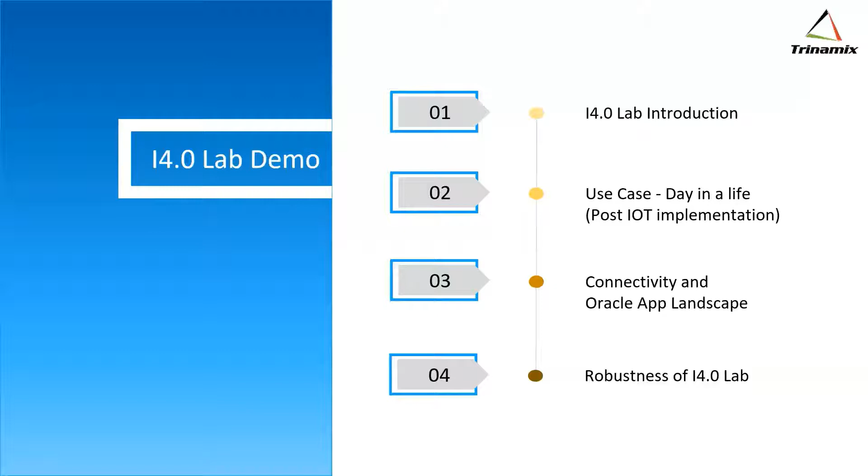For this demo, first I'll introduce different components of the factory, which we have built at a miniature version. Secondly, I'll walk you through a use case we've built over the lab through a day-in-a-life scenario for personnel across different hierarchies and departments, administrating, monitoring, and supporting production, and how we achieve it. Lastly, the modularity and robustness of the lab, through which we can orchestrate common use cases across different industries through the Oracle application landscape.

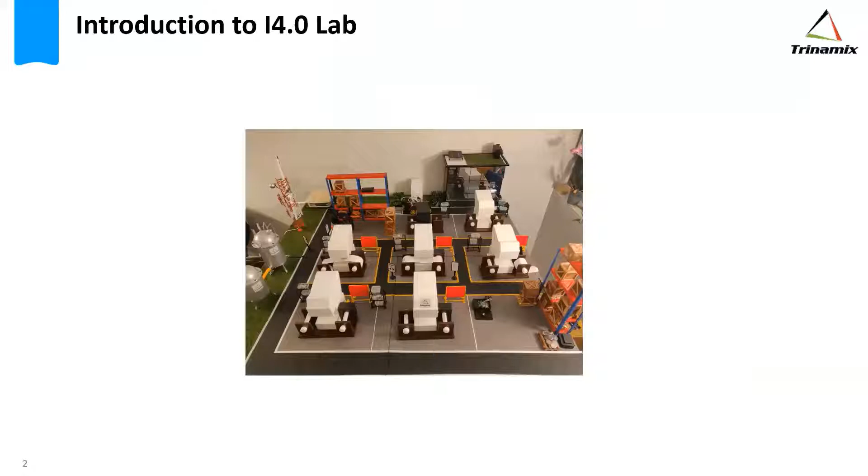The lab is at our San Jose office. In this lab, we have 7 miniature machines on the shop floor, each housed with 2 motors and gears, replicating some standard mechanical movement found across industrial machines.

Along with this, we have 7 functional assets, again built at a smaller version, like forklift, boiler, conveyors, office assets, solar panels, and connectivity assets supporting the production system. We also have raw material and finished goods racks with sensors at each locator and a barcoding system to understand storage capacity utilization and inventory management.

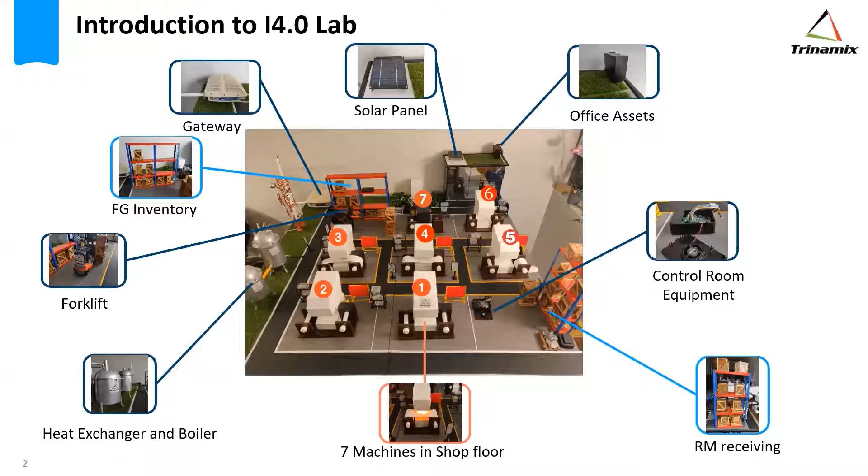Let's explore an industry use case of an auto ancillary muffler manufacturing. For this part of the demo, let's consider a scenario where I am the factory manager and you have come for an industrial visit primarily to see our company's efforts towards digital transformation, and how we have enabled our workforce to enhance customer experience by building higher quality products, supplying at one of the lowest costs.

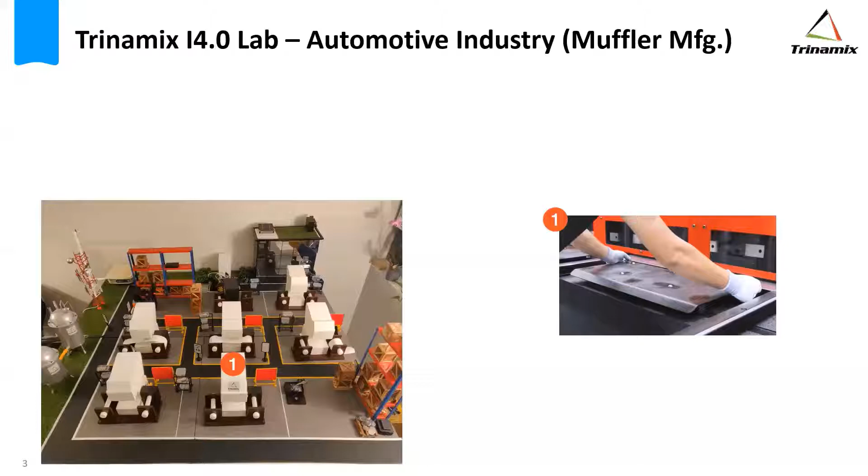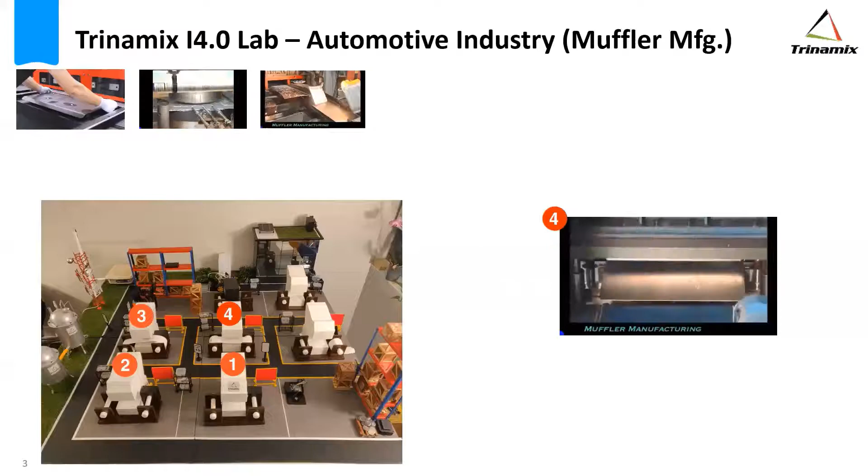Firstly, let's understand the production process. We have 7 workstations starting from sheet cutting, where large sheets are transformed into smaller pieces. Thereafter, a series of stamping and forming operations transform the sheet into the required shape. Post that, we assemble and weld the components to make the final product.

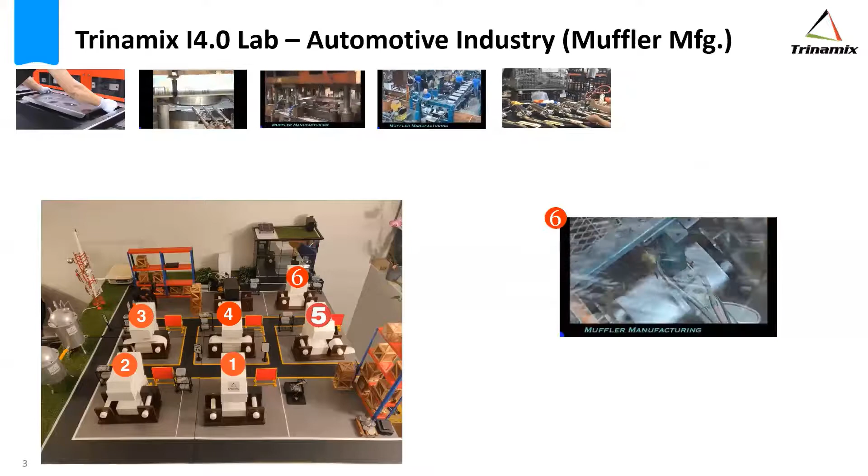In the end, the manufactured muffler goes through a final quality check before it can be packed and shipped.

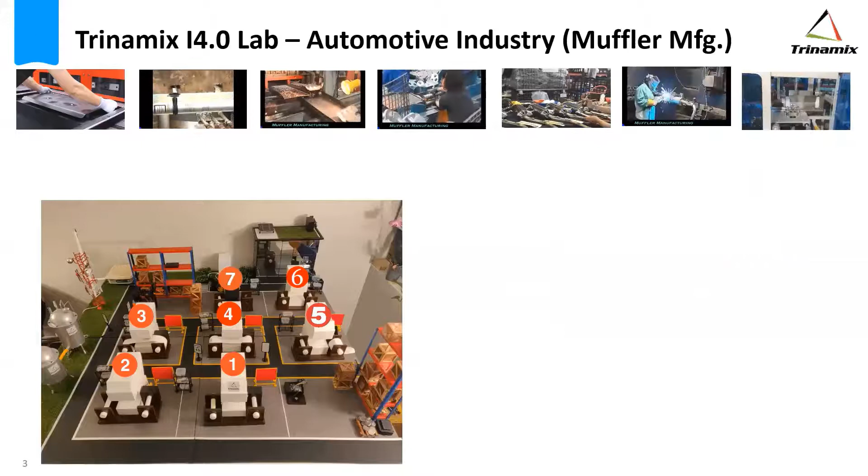For each operation, to ensure quality, cost, and machine health, we need to keep monitoring 5 to 7 machine parameters at each stage in the routing. In addition to the machine parameters, we also check machine status and production output status. While machine status helps us ensure safe practices, like keeping the door shut while the operation is running, and analyze utilization, production output status helps in understanding quality and optimum throughput.

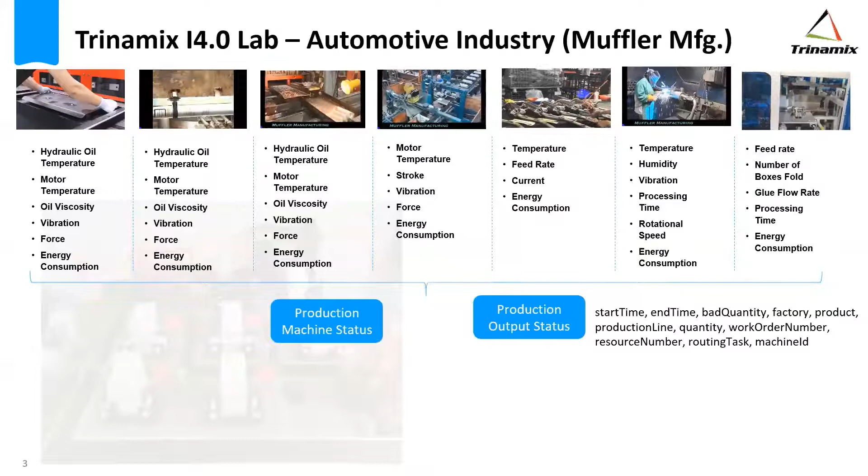Now let's dive into a day-in-a-life scenario for different personnel across the hierarchy, and how the Oracle application landscape has enabled each of us to monitor, manage production, and health status of the assets. There are many examples of derived benefits from this digital transformation of ours. Let me share some of it.

As part of my daily routine, 30 to 40% of my time used to go into reviewing factory performance, like overseeing workers, capacity and equipment utilization, maintenance, Gemba walk, quality check, scrap, on-time delivery, safety, etc.

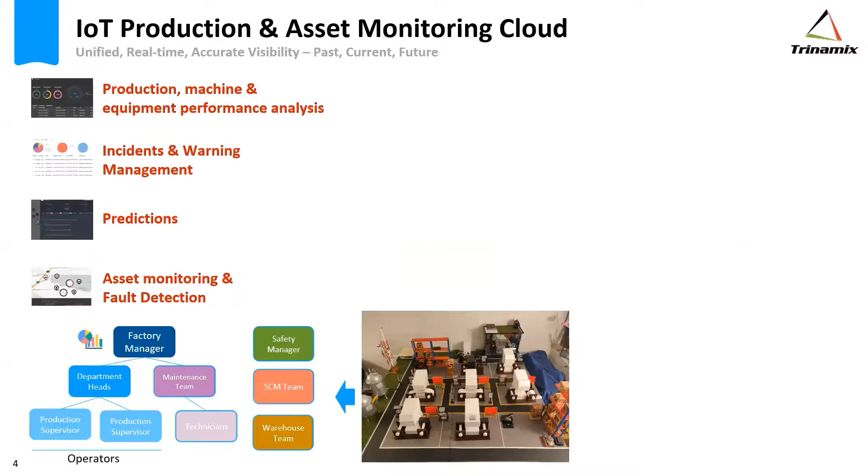The IoT application, on the other hand, has empowered me to capture all information in a single pane of glass, that too on a real-time basis.

Currently, I'm getting text notifications for anomalies, like my assembly machine having an unusual stroke length. I know exactly which orders would have possibly gotten impacted. Based on that, we have triggered thorough quality checks for the affected work orders.

One other beautiful example was we were monitoring machine failure prediction for our forming operation based on its motor temperature. Once it reached a certain level, we could trigger action to avoid demand at risk, meanwhile making the relevant spare parts available. With the availability of real-time information and quick decision making, now I can focus on strategic improvements and prioritizing investment projects.

Based on industry benchmark, we noticed significant lagging, approximately 15 to 20%, in terms of OEE for our machines. Post IoT implementation, my department heads on the shop floor are able to continuously monitor the OEE to reach our set target, addressing availability, quality, and performance issues on a real-time basis.

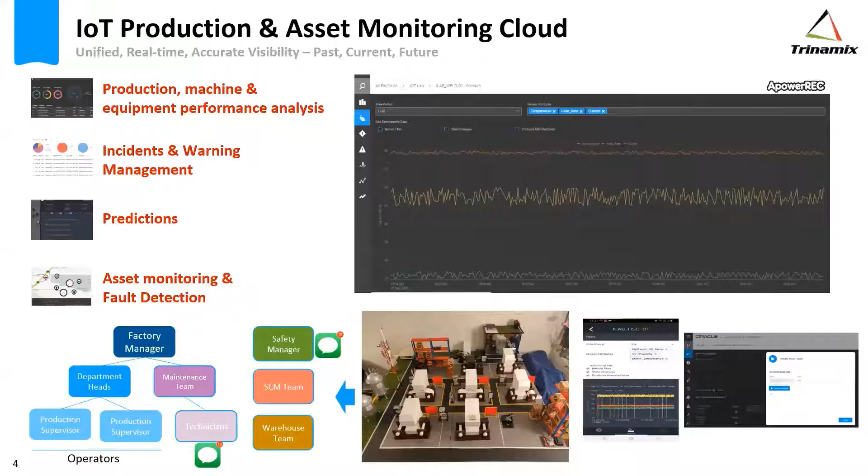On top of my mind, I can recollect the benefit of Oracle IoT application, which helped us avoid a major safety incident. Our technician was addressing an abnormal motor temperature increase in a sheet cutting operation. While working on the anomaly, he got a message about excessive pressure increase on the boiler supporting production. Reviewing sensor data on the Oracle IoT mobile app, they identified a non-functioning valve as the reason. Quickly, he solved the problem by remotely opening the safety valve through bidirectional communication, avoiding a catastrophic incident.

Now let's see how we achieved it. As the first step towards our Industry 4.0 journey, we went through design thinking to lay down a roadmap, score and measure our readiness, benchmark KPIs across and within sectors, and formulated a process decomposition report to enhance our ROI and ROX. One of the major outputs of the design thinking was to revamp our IT and OT systems.

Speaking about our OT systems, the machines on our shop floor are old, incapable of connecting independently, because of which capturing relevant attributes was impossible. We were solely dependent on the skill set of our workforce, making it a challenge to sustain quality and productivity.

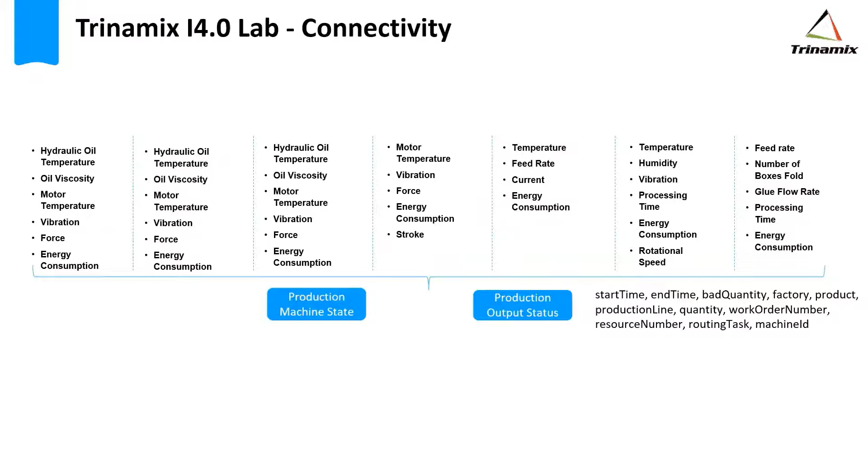In the effort to capture relevant attributes on a real-time basis for proactive and predictive actions, we connected our machines indirectly via a gateway with devices and sensors. For our mobile and remote assets supporting production, we got them directly connected to ensure uninterrupted production support, providing alerts, warnings, and health status of the asset.

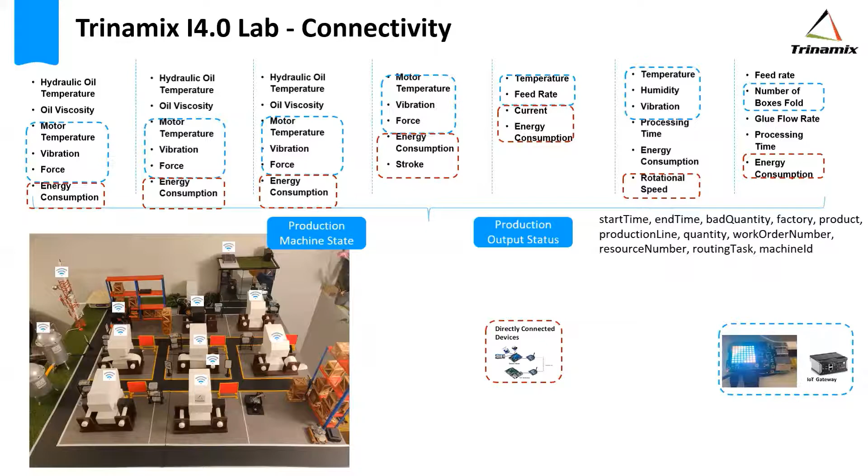We also captured some asset sensor data through LoRa devices and third-party cloud service.

From the IT side, until now we managed our supply chain transactions through a mixture of on-premise systems and Excel sheets, in order to understand work in process on a real-time basis and automatically charge resources and consume raw material to transact on ERP systems. We invested in barcoding at each stage in the routing based on the design thinking output on investment areas, considering aspects like ease of management and out-of-box connectivity to middleware.

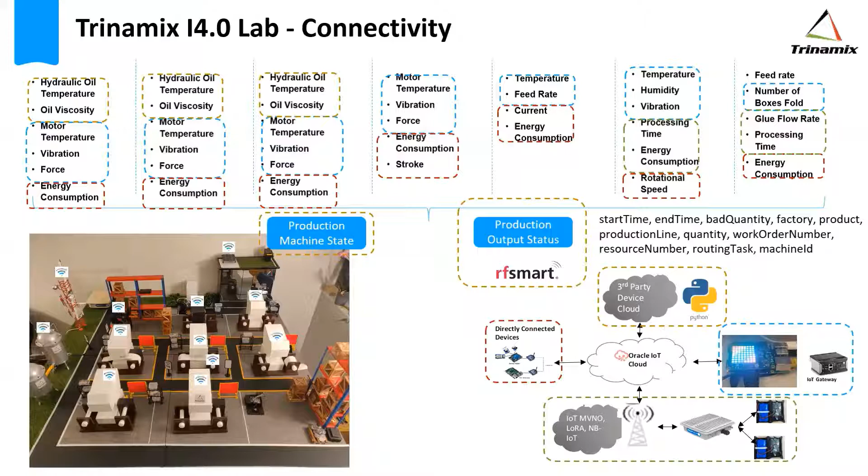And enterprise application delivering end-to-end industrial IoT solution, we went ahead with the Oracle application bundle to create a digital twin for our factory. Let's review the solution from an architectural point of view.

We partnered with RF Smart to capture production output status onto our Oracle Fusion application, established IIoT hardware connectivity with Oracle IoT Cloud Service, which in turn integrated with the Fusion application to contextualize transactional data from the shop floor.

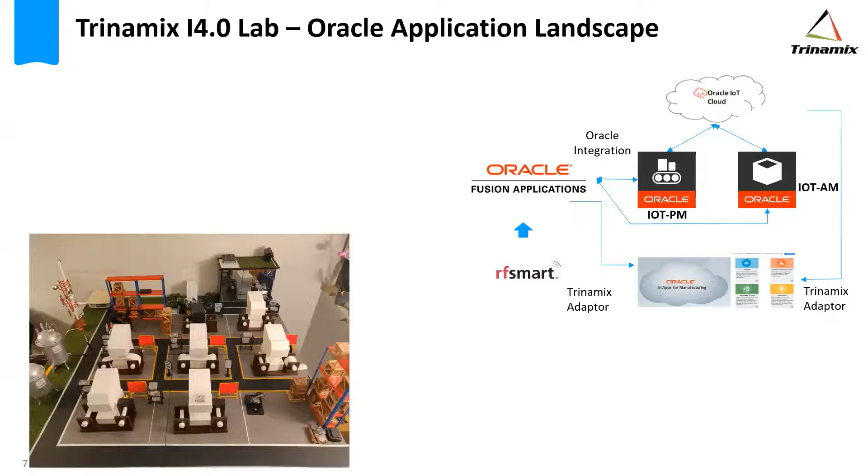Further, we built an AI layer through Oracle AI Apps for Manufacturing application, tightly integrating OT and IT systems. This was done primarily envisioning three things. First, to get insights from the 5M - machine, method, material, management - and its impact on KPIs, without having to identify correlation between thousands of variables across the production.

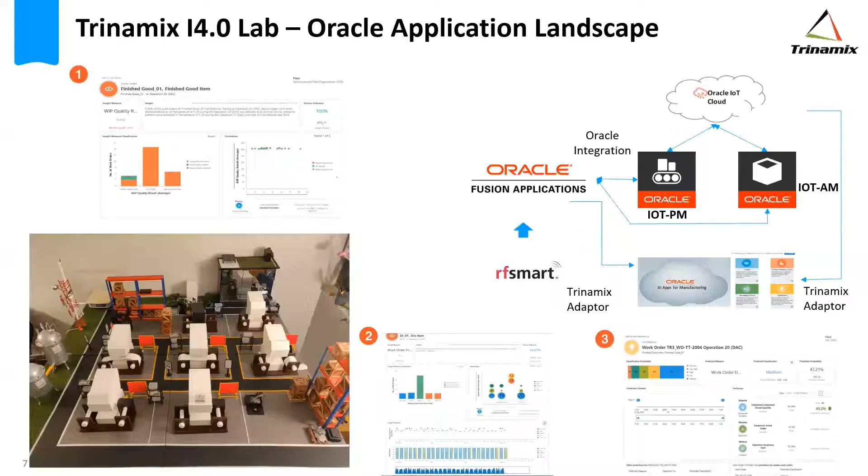Second, to derive limits for sensor attributes at each stage based on historical data, and further set those on IoT applications for real-time insights and warnings. Lastly, and most importantly, to predict quality, yield, and cost outcomes for work-in-process work orders.

To display how we can quickly repurpose the lab to present smart manufacturing use cases across multiple industries, let me categorize the point into two broad aspects. First, replicating the actual shop floor condition onto our lab.

For that, we have supported the lab with programmable time control switches to mimic utilization, variable feed of conveyors for different throughput, machine speed control to replicate sensor data, etc.

The second aspect is to trigger incident warnings, alerts, and anomalies during the demo. To help us achieve that, we have vibration motor, temperature, speed and control, and current controls for triggering different conditions. Also, our LoRa devices can quickly replicate sensor attributes based on customer sample data remotely through bidirectional communication.

With this infrastructure, we can quickly repurpose the lab to support customer POCs, while giving them a touch and feel of how their digital factory would work. Thank you.